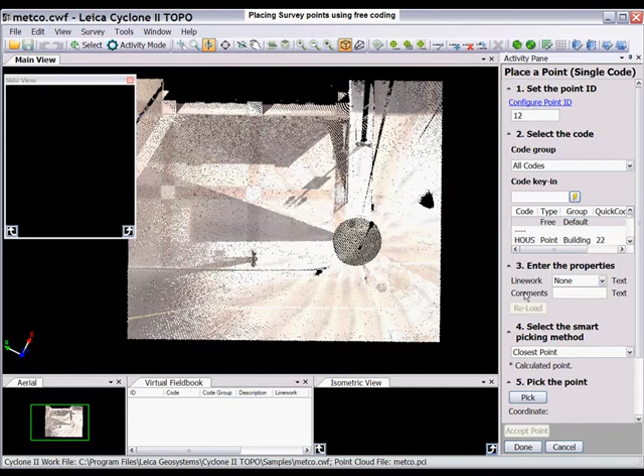Skipped over before. Line work can be added to the point cloud and exported. And in Topo 1.1, moving forward, you can export line work along with point work through a DXF interface. This is very nice. But first, let's cover how line work operates, how you put down line work and work with this number 3 setting here under the place point activity pane.

First, I like to always work in this intensity hue. Again, move the gamma up a little bit to darken the point cloud. I like to do that. We're just going to code this center line here with some line work. So let's set that up.

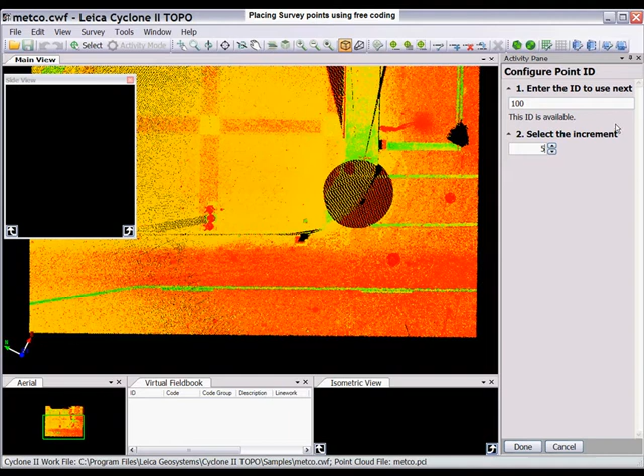So I'm going to configure my point ID to be 100, and I'm going to set my increment to 5. It's always good to have some kind of increment so you can place a point in between. So if you have 100 to 105, you can place a point 103 or 102 in between there, if you miss a point and want to come back later and add it in. Again, I'm going to be using free coding. The other type of coding is covered later.

So with free coding, you have to tell it that you want to start line work. So to begin with, we can place lines or arcs or areas. And areas are closed polygons that would go around electrical boxes or buildings and whatnot. But let's start with begin line.

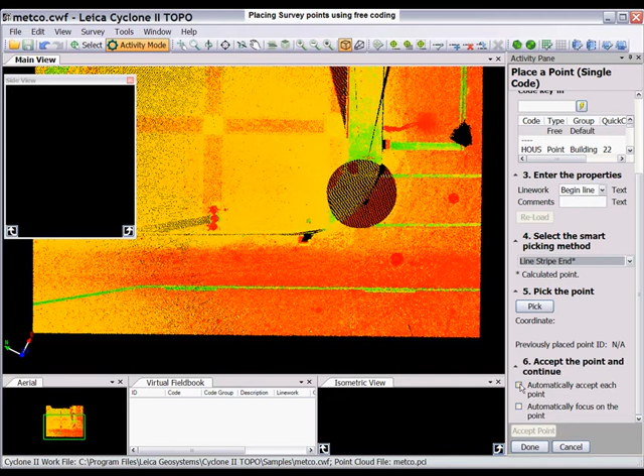And our smart pick, since we're going to be doing a line stripe, we're going to use a line stripe smart pick here, and we're going to keep these checked off for now. These automatically accept checked off. Our pick zone size is still fairly large too, so we want to configure the pick zone, move it down to maybe 10. It's important to play around with pick zone size, and then we'll start picking.

So you can see here it's picked, it's a good candidate. We can see here in the ISO view, you can say accept point. Now you see the line work box automatically goes to continue line. So watch what happens when I click my next point, and then I accept it, and you'll see the line work show up. Okay? So having accept and focus clicked off is very good in the beginning.

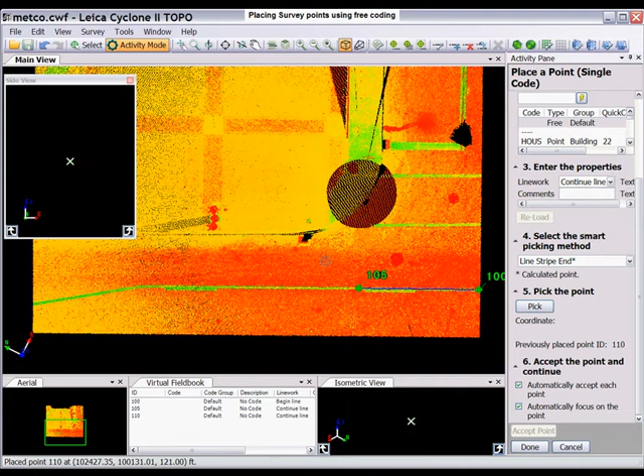But when you get more confidence in the picker itself, you may choose to turn both of these on, and watch what happens here. You can just keep on selecting down the road here, and it centers your pick as it accepts the point. And your last pick, you want to tell it to end line. Okay? So you've coded a line on a point cloud now.

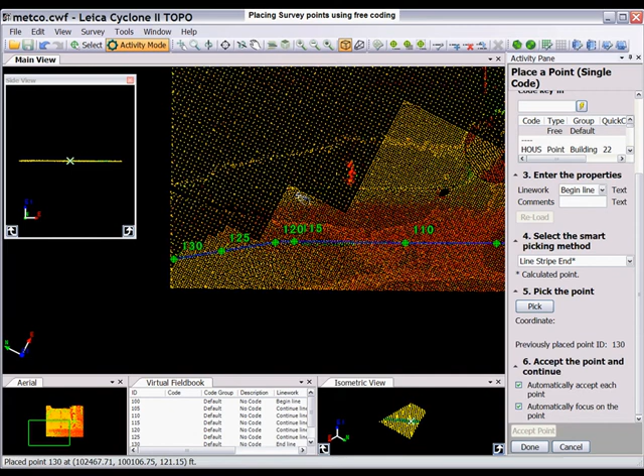You can see the results of this in the virtual field book. I'm going to move the field book down the screen here so we can see what we've done. We can see the ID of the point. Now remember, we're not using codes, so this is blank. But this is all coded here, begin and end. If you were to export with a field book, for example, then these codes would leave with the field book. Or if you were just exporting these lines as DXF, they would come into AutoCAD as shown.

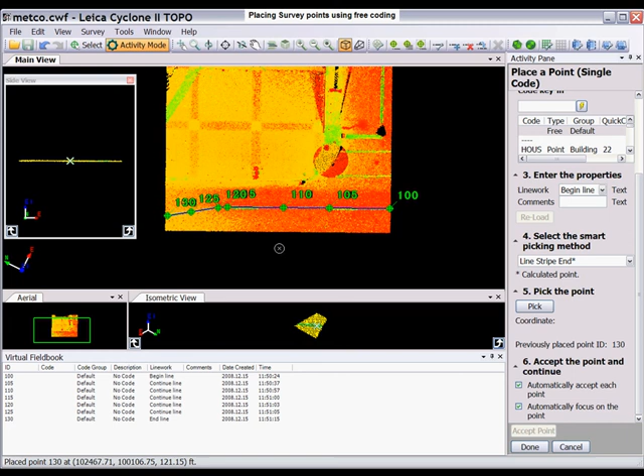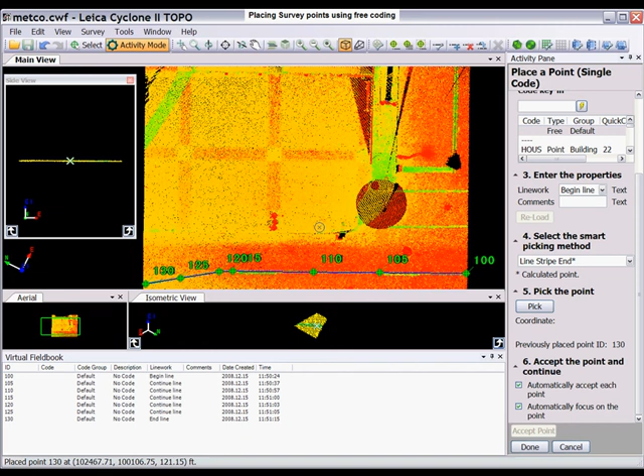Now the nice thing about the line work is that it's very quick while using the smart picks to place lines. But you can place more than that. I'm going to go ahead and place line work around this curb area and show how arcs work now. So I'm going to go back